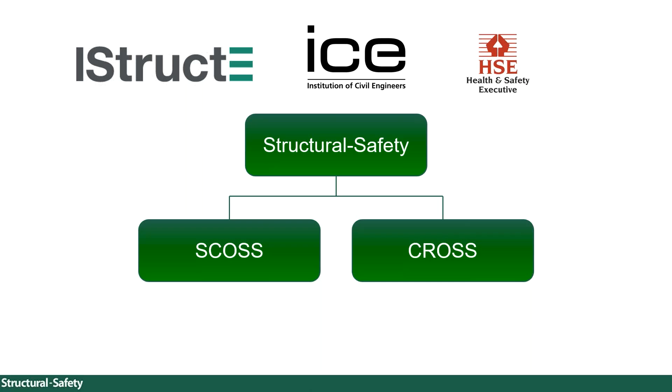And the name Structural Safety is a group that has two parts, which are SCOSS and CROSS. So the first part is SCOSS, which stands for Standing Committee on Structural Safety, and it was set up quite a long time ago in 1976, and their role is to maintain a review of the building and civil engineering matters that affect safety, and they do this by following this very simple process.

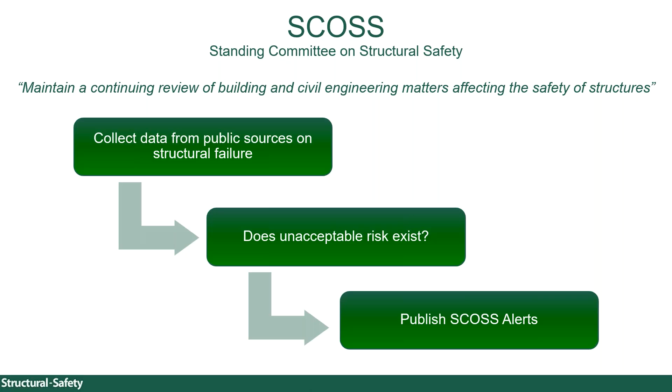Firstly, we collect data from any public sources on structural failures, so that's all the failures that you hear about in the news. We then analyse all that data and decide if there's any unacceptable risk in the industry, or if unacceptable risk might arise in the future. And if there is any unacceptable risk, we then publish safety alerts. Most of the time, the safety alerts are really to raise awareness of that risk so that people can manage it. We're not always able to provide the answers to the risks, so most of the time it's just about raising awareness.

And this slide here shows some recent safety alerts that we've published. So top left was a very severe fire at a multi-storey car park in Liverpool at the end of 2017.

So there was about 1,300 cars that went on fire during this fire. Interestingly, the fire design for car parks is based on the theory that fire will stay in one car if it goes on fire, but won't jump between cars. But in this instance, the fire did jump between cars, and it jumped between levels in the car park. By the time the fire service got to the car park, the fire was already badly out of control. So it's a good example of how a design philosophy can be breached, and the catastrophic consequences that can have.

Top right is the collapse of a steel frame building in London in 2012, and I'll speak about that in the next few slides. Bottom left, I'm sure most of you know about this already if you're UK based - it's the collapse of the outer leaf of a cavity wall at a primary school in Edinburgh, and I'll touch on that in later slides. Bottom right is our most recent safety alert, about the failure of RAAC planks, which stands for reinforced autoclaved aerated concrete planks. These were a form of construction used in the 60s and 70s, mostly in schools, and recently there have been some safety issues with these planks.

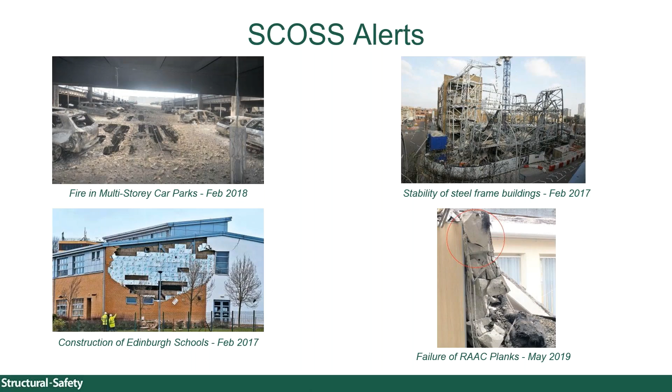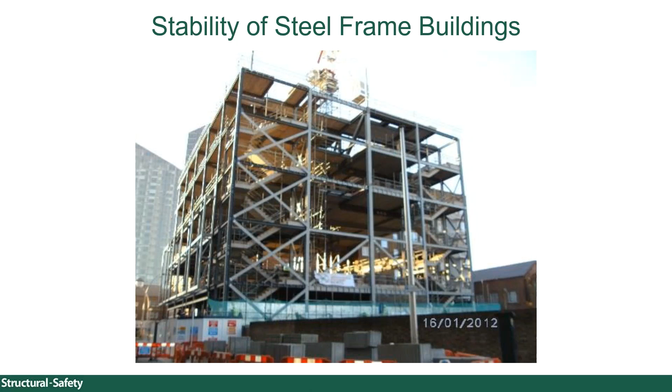So this is the steel frame building in London, which collapsed in 2012. As you can see, it's a braced steel frame, and it was a religious building. One of the design requirements was that they wanted to have a column-free zone at first floor level for large congregations. So this is one of the design drawings.

So in order to achieve this column-free zone, if you look at roof level, you can see there's a floor deep truss that spans from the front of the building to the back - a 36-metre long span truss, which is floor deep. The red vertical elements are tension hangers that were welded to the bottom of the truss, and these tension hangers then supported the third floor, shown in blue. That then allowed the column-free zone below the third floor.

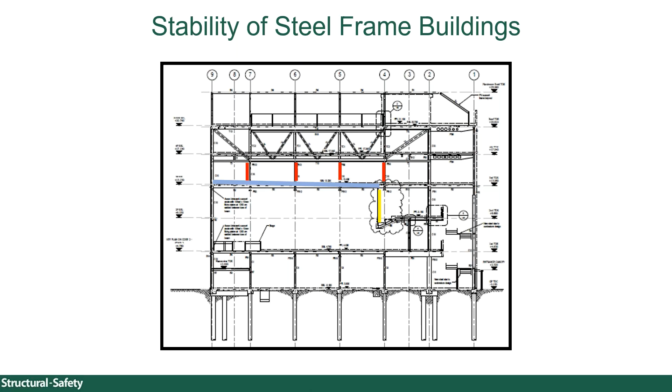So it's definitely not your standard steel frame building design - something a little bit different, and a little bit more risky than a normal design. And then the whole thing catastrophically collapsed. This collapse happened about 15 minutes after the workers left site that day. So although there were no injuries or fatalities, it definitely was a near miss and could have been much, much worse.

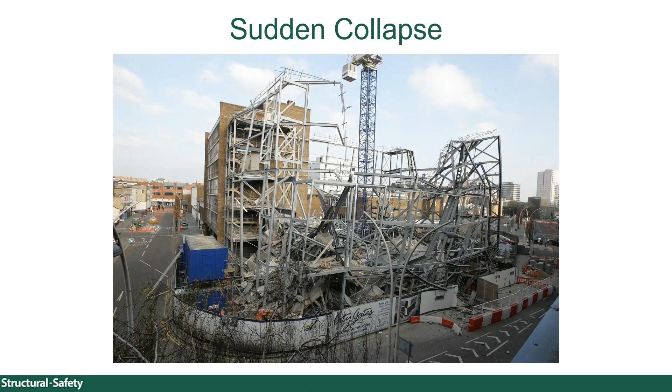So the HSE did an investigation into this collapse, and they were able to share the investigation report with us, and we then produced a short safety alert on it. There were two main technical causes to the collapse.

Firstly, on the left, you can see that there was defective site welding of the hangers to the truss. Just as a reminder, these are the tension hangers that were hanging off the bottom of the truss to support the third floor, and the welding was of poor quality.

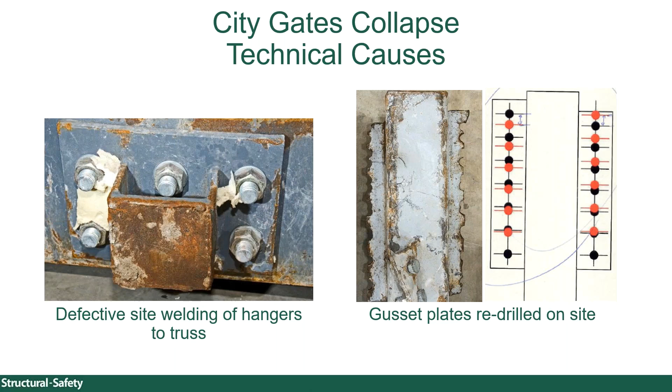Then on the right hand side, at the bottom of the tension hangers, there were gusset plates which were then bolted to the third floor beams. But when the contractor on site went to bolt these gusset plates to the third floor beams, the bolt holes weren't lining up properly, so they re-drilled the bolt holes, shown as the red holes on the right. For all you structural engineers tuning in, you'll know that significantly reduces the shear capacity of the gusset plate along the line of the bolt holes.

So what are the main lessons to be learned from this collapse? The first one's about robustness - structures should be designed to be robust so that a local failure does not cause disproportionate collapse. One theory about why this collapse might have been so catastrophic was that one of the tension hangers failed, and that then overloaded the adjacent tension hangers, giving a zip effect of all the tension hangers failing. That just shouldn't happen, because post Ronan Point, now that we have part A3 of the regulations for disproportionate collapse, structures should be designed to be robust to prevent this kind of failure.

And the second point here is that if you're designing any tension structures, always try and design them to have some sort of ductility so that you can get warning of failure.

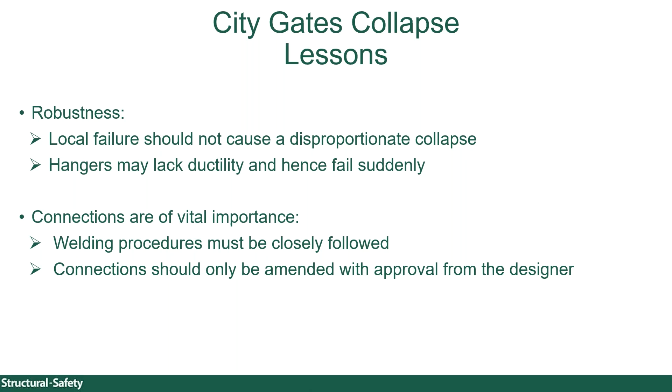The second lesson is about the importance of connections. On this project, they decided to weld what was a very safety critical connection. Our advice would be to try to avoid site welding if you can - go for bolts or off-site welding where it can be done in a more controlled environment. But if you have to do site welding, then you've got to follow the procedures very carefully, and that's everything from preparing the surface, to getting the right qualified welder, to implementing the weld, to testing the weld, inspecting the weld, approving the weld. There's a whole host of procedures that have to be very carefully followed.

Interestingly, one of the HSE's recommendations on this project was that the structural engineer could have specified 100% inspection of these welds because they were so safety critical. And the second point on connections is that contractors should not be amending any design on site without going back to the original designer first of all.

The third lesson from this incident is that designers should always try to make contractors aware of risks involved with unusual structures. Although that seems fairly obvious, it can be difficult, especially on a large project, because you become very familiar with it and risks might seem obvious to you. But would a contractor who's only looked at your drawings for an hour or two, and doesn't understand your design in as much detail, appreciate those risks? Maybe not. It might be a good idea to get a colleague in your office who hasn't been involved in the project to look at your drawings and see if they spot the risks you think are obvious.

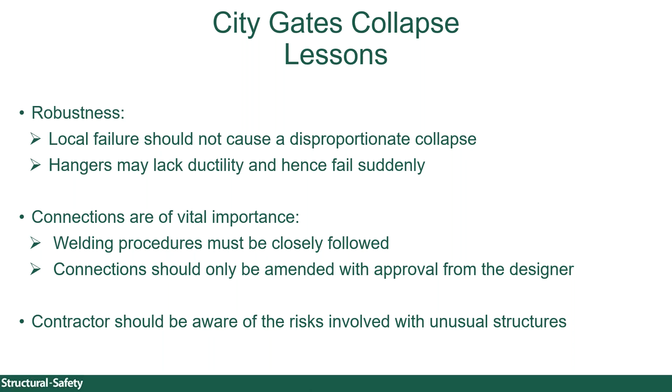This is the Edinburgh Schools wall collapse. It was a gable end wall that collapsed due to a wind suction load. Wind comes along the length of the building, and when it gets to the gable end, it causes suction on that wall. Nine tons of masonry collapsed here. Similar to the last example, this was a real near miss, because this was a pathway kids used to walk into school every morning, and the collapse happened just a few hours before the kids would have been there.

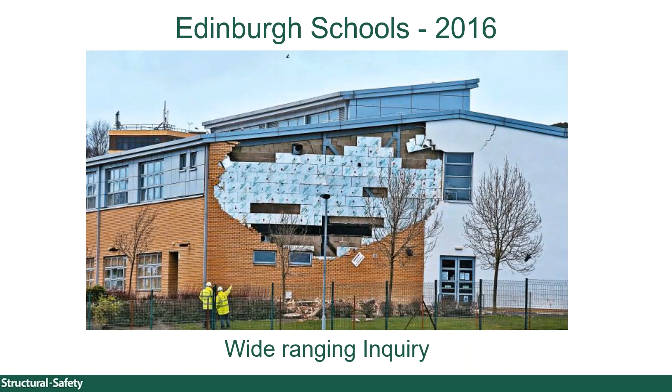The Scottish government did an inquiry into this collapse, so it's a publicly available document you can find online. Like any collapse, there was a whole host of issues that combined to cause it, but one of the main causes was inadequate tying of the inner leaf to the outer leaf of the cavity wall. I'll explain why that happened in the next few slides.

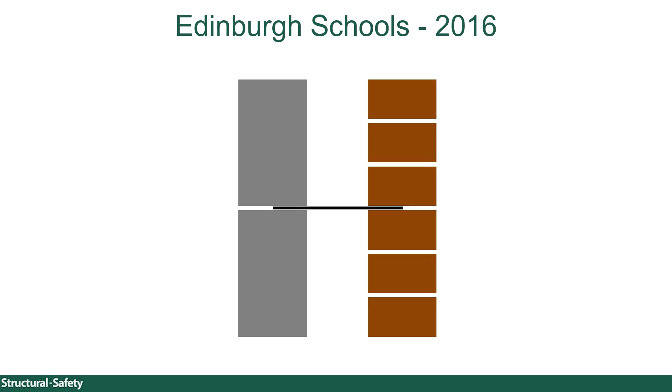Typically, if you're building a cavity wall, you build the inner leaf and outer leaf together, putting in wall ties as you go, so there's no real safety risk there—it's a fairly simple process. But on this project they were running behind on program, so to save time they decided to build the inner leaf first, since that allows a watertight building and lets follow-on trades start working inside. So they built the inner leaf and put the wall ties in, but it's pretty clear the wall tie isn't balanced in that state, because there's no outer leaf there to balance it.

This is only a problem with the heavier wall tie types—if you've got the lighter types, it won't even be an issue. But with the heavier types, the wall tie will fall over. It's not really a big issue though; there are a lot of solutions. You could hold the wall tie in place while you put the next block on top to stabilize it, you could get longer wall ties, or you could mechanically fix the wall tie to the block.

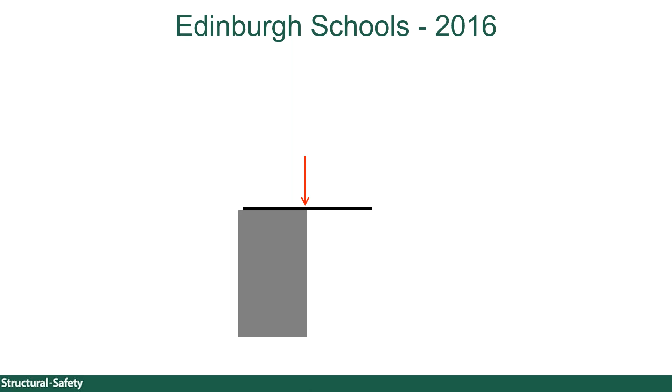But the brickies on this project were getting paid per brick or block, so the quickest thing for them to do was move the wall tie inwards so it was balanced on the inner leaf. That meant when they went to build the outer leaf, they no longer had the minimum 50 millimeters embedment. So it should be pretty obvious that when a wind suction load comes onto this wall, it's going to pull the outer brick leaf down, because it's effectively acting by itself with very little or no support from the inner leaf.

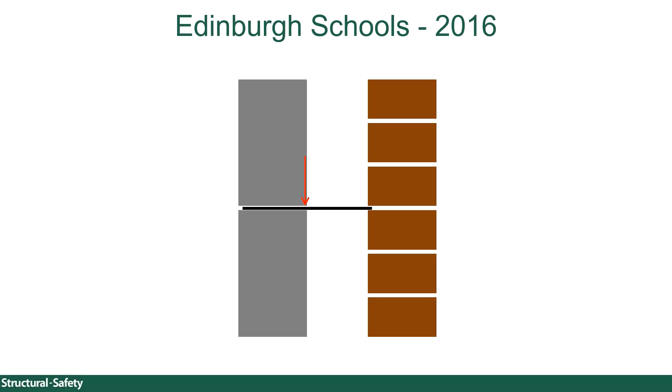So the alert discusses several topics. One of them is long span steel beams, where the rotational demands at the end connections are proportional to span cubed. So SCOSS feel that it's questionable whether industry standard detailing rules remain valid for such long span steel beams. For example, if you have a very long span steel beam that's designed as simply supported, but there's very high end reactions that require a large number of bolts with very deep connections, then that connection might behave more like a fixed end connection as opposed to a pinned end connection.

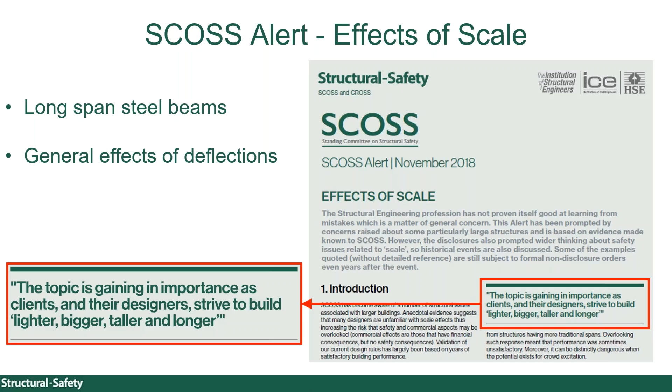General effects of deflections are also discussed, where deflections due to tolerances combined with bending can lead to in situ concrete slabs being much thicker and therefore much heavier than designed for. This is the case if a beam is going to bend downwards, and if the tolerance is also downwards, then you can get this situation arising. This is especially a problem if the slab is designed to be installed level as opposed to a constant thickness, because if you imagine at mid-span of a beam, the beam's bending and you want to put more concrete in to get the slab level, that's just going to add more load to the beam at mid-span, which is going to cause it to bend even further.

The alert also discusses steel thicknesses, where it doesn't seem to be uncommon now in projects to have steel thicknesses of over 100 millimeters. The danger here is that designers might be moving into territory that they might not have much experience in, so they might overlook some key technical issues, such as the fact that thicker steel is less homogeneous, so it's more prone to lamination, or becomes more vulnerable to through thickness cracking.

Now, these are things that you can design for, but you can only design for them if you know that risk is there. And similarly for welding very thick steel, thicker steel requires more care in welding, since the cooling rate of weld beads is linked to the thermal conductivity of steel, which in turn is linked to the thickness of the steel. So the welds in thicker steel will cool quicker, so they might become hard and brittle, and therefore they might not meet the ductility requirements. But again, if you're aware of this, then you can manage it by either applying specialist welding procedures or post-weld heat treatment.

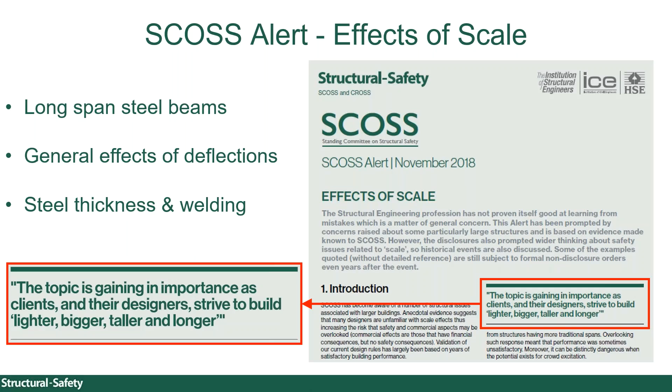Okay, so that's SCOSS. So just as a recap, SCOSS are looking at everything in the public domain. The other part of structural safety is CROSS. CROSS stands for Confidential Reporting on Structural Safety, and it was set up in 2005 with the role of really capturing and sharing lessons learned from safety issues which might not otherwise have had formal recognition.

So basically, the thinking at the time was that it's very good that SCOSS are looking at everything in the public domain, but there's a huge amount of stuff that happens below that never makes it into the public domain. So they decided to set up CROSS as a mechanism for the industry to submit reports and share and learn lessons from each other.

So stage 2 of this process is that we then process the report. There's 2 parts to this. Firstly, we remove the reporter's details, so there's a very small number of people that ever get to see the reporter's details. And we also remove any identifiable details from the report because we're not interested in blaming anyone or anything. So we remove any reference to a project or a product or an individual or a company.

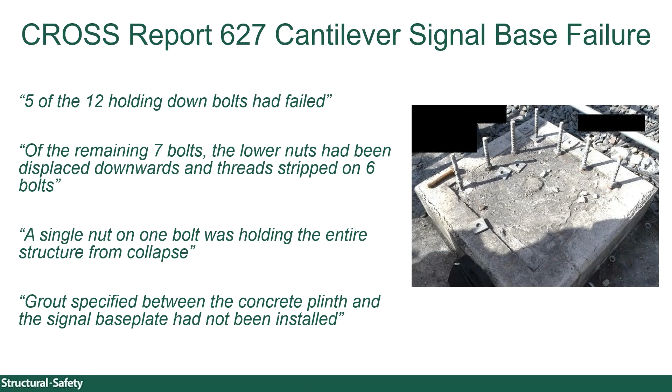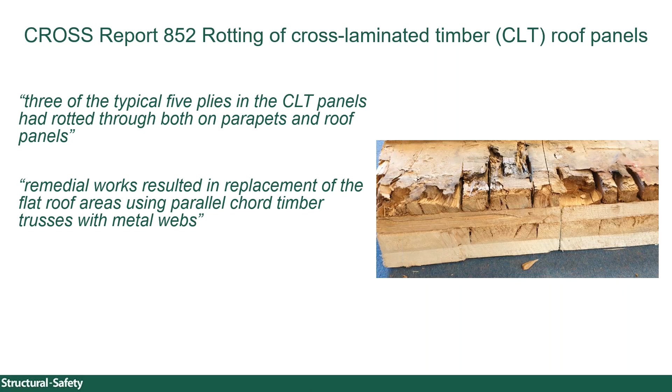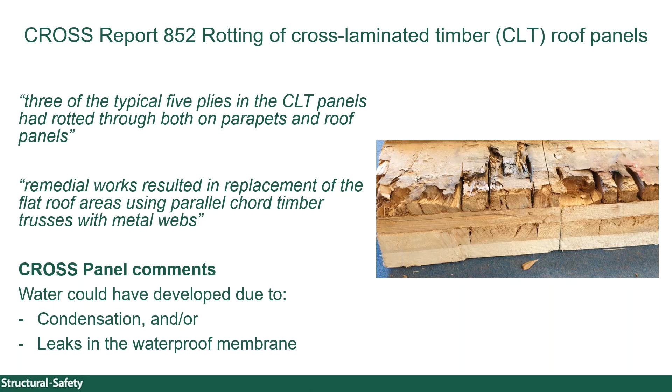They go on to say that the remedial work consisted of replacement of the flat roof areas using parallel chord timber trusses with metal webs. The CROSS panel's comments for this report focused on how the water could have developed, which they speculate could have been due to condensation or leaks in the waterproof membrane. They included links to a British standard on controlling condensation in buildings, as well as BRE papers on CLT and thermal insulation. If you want to read this report in full, have a look at our latest newsletter on our website.

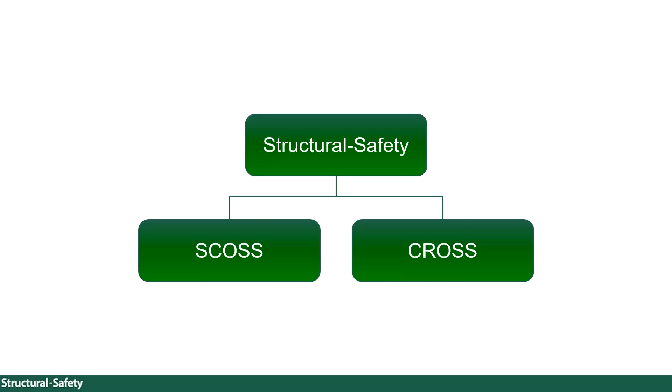I hope those explanations of SCOSS and CROSS make sense, and that provides a bit more clarity.

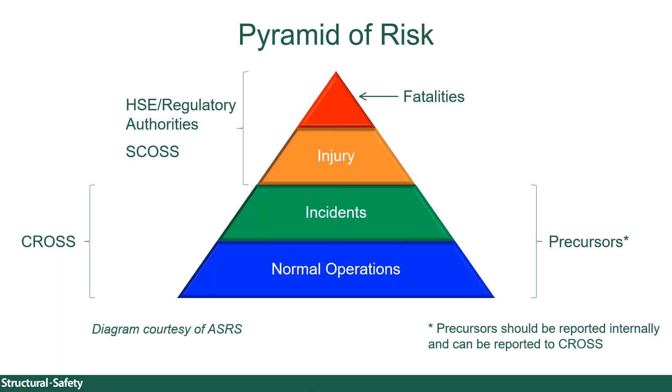We have a SCOSS committee and a CROSS panel, probably about 20-25 people altogether, mostly engineers from all different fields and industries. Contractors, we've got a government representative, HSE, Highways England - a lot of the major players are involved. We even have a solicitor who reviews all of our work before we publish it, and then we have a few young members there as well.

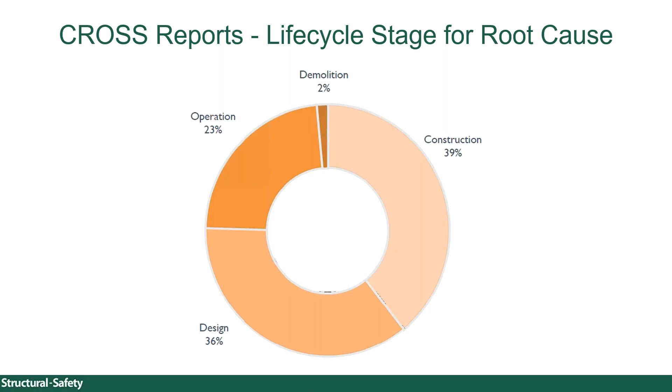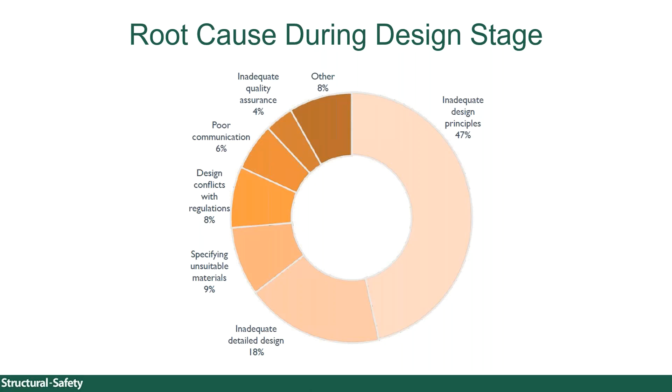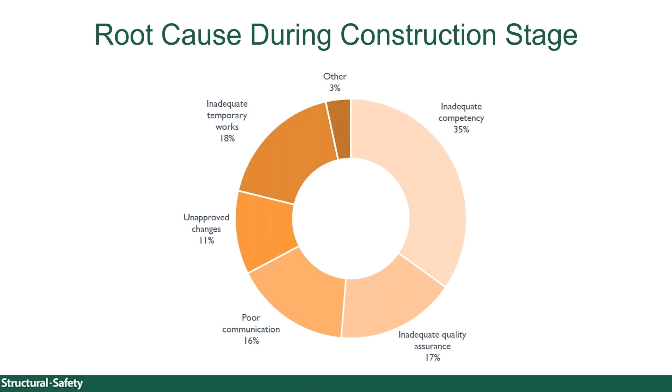As I said, we try to look for trends in our reports and then take action on those trends. So fixings and connections is a trend.

On the left was the collapse of a suspended ceiling in a cinema. It happened overnight, so again, a near miss. Here they used lightweight fixings to connect the ceiling to the slab above, but it wasn't a lightweight ceiling at all—it was 50mm thick plasterboard with quite a lot of services, so it just wasn't taken very seriously.

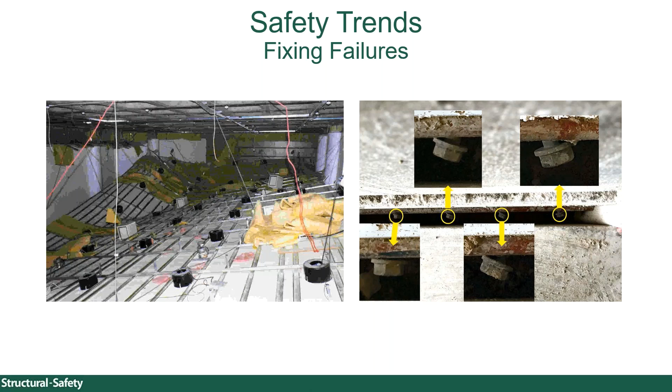On the right, this was a steel angle being bolted to a reinforced concrete core, and that steel angle was then going to support precast concrete stairs. But when the contractor went to bolt the steel angle to the core, the bolts clashed with reinforcement in the core, and instead of just taking the bolt out and moving it 30mm to the side to avoid the reinforcement, they tried to angle the bolts to miss the reinforcement—just really poor construction practice.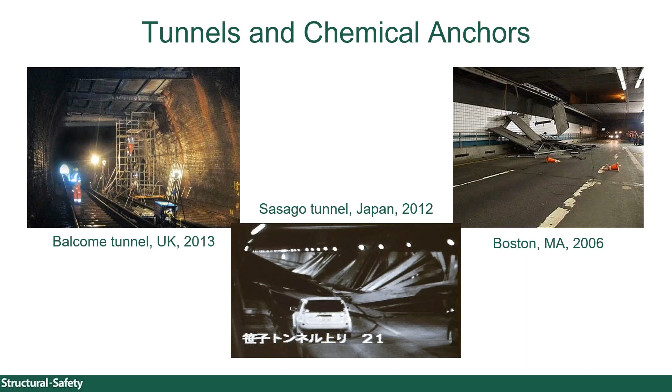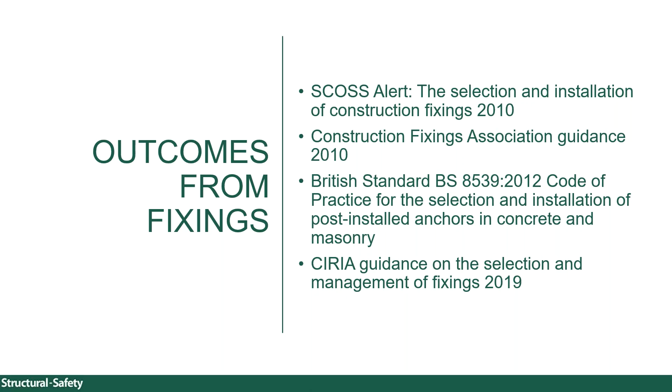So we issued a SCOSS alert in 2010 on fixings. In the same year, the Construction Fixings Association issued guidance. There's a British standard there for fixings now. And literally a few months ago, CIRIA released really extensive guidance documents on the selection and management of safety critical fixings. So there's quite a lot of good information out there now.

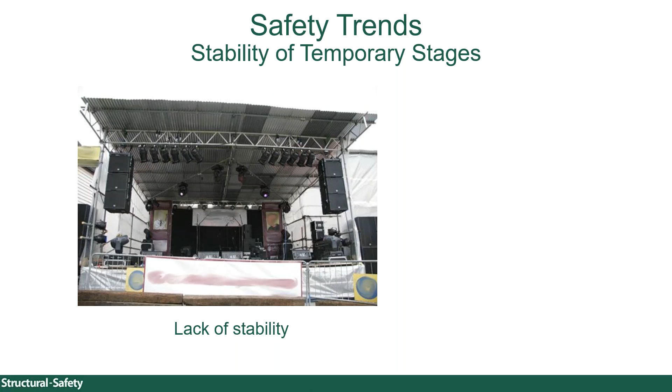Around the same time, we received a CROSS report about another temporary stage. This time there was a stability system—they used water tanks connected to the stage by straps. But there's a whole host of issues here. Firstly, the straps aren't even tensioned.

Secondly, the tanks aren't anchored down to the ground. So if it's a wet day, the tanks might just slide along the wet grass because the coefficient of friction will be low. And thirdly, water tanks just isn't a very robust solution, because if someone punctures a water tank, then you've lost your stability system. But again, no collapse, but the precursors for a collapse are definitely there.

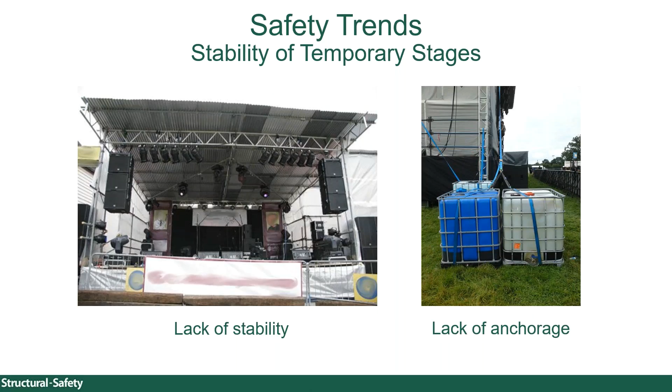And then about a year after we received these reports, a stage in Indiana collapsed during a concert, where 7 people were killed during the collapse. And the stability system here was actually quite similar to the last example of water tanks, but instead of water tanks, they used concrete blocks, which is more robust.

But the designer had specified that the concrete blocks were to be placed on top of concrete. But then when they started to install the little marquee shown in white around the main stage, these clashed with where the concrete blocks were meant to be. So some of the concrete blocks were actually placed on top of grass instead, which has a lower coefficient of friction. So the blocks slid along the grass.

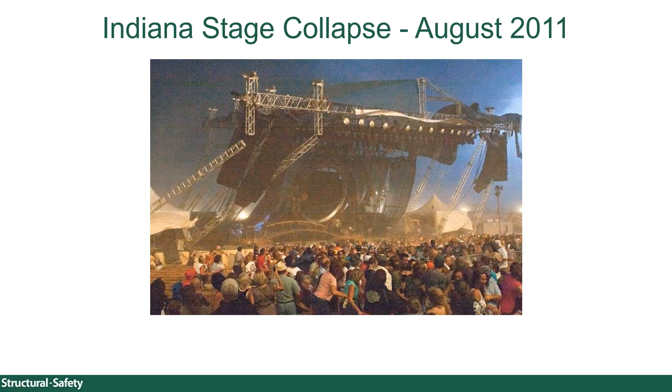So again, we issued a safety alert on this. And that safety alert was used as part of the checking procedures for the 2012 Olympics in London, which had a really good safety record. And the IStructE have an excellent guidance document on temporary demountable structures as well. So again, there's a lot of good information out there on that topic now.

So tower block tragedies, Ronan Point, for all the structural engineers tuning in, you'll be well aware of Ronan Point. So 1968, there was a small gas explosion at the top of this tower, and it caused the external wall to pop out, and the slabs above then fell down onto the slabs below, and you had a progressive collapse of the corner of the structure.

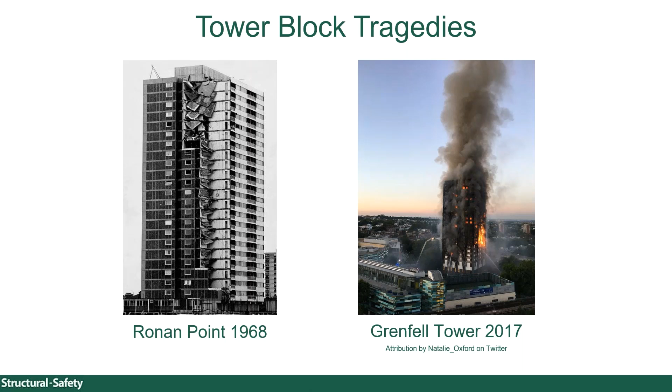And the thinking at the time was that the damage caused was actually disproportionate to the initiating incident. And that is where part A3 of the building regulations for disproportionate collapse came in. So the point of showing this slide is to say that you never want something like this to happen, but the positive is that the industry reacted by improving legislation so that going forward structures will be designed to be more robust. And then on the right you've got Grenfell Tower, the ramifications for which will change how the risk of fire is managed for tall residential buildings.

So what does 60 minutes fire resistance mean? I added this slide probably well over a year ago. I attended a lecture from Colin Bailey. It was his inaugural lecture for becoming president of Queen Mary University of London. His lecture was on collapse of World Trade Center 7, which collapsed due to a fire. A very, very interesting presentation.

So Colin, he's a structural engineer with a specialism in fire, and what I found very interesting was that he said throughout his career he's seen a lack of understanding of the behaviour of structures during fire from engineers. And he asked this question, and a lot of people didn't seem to know the answer. So I'm a structural engineer, and I thought I knew the answer to this question, and I didn't.

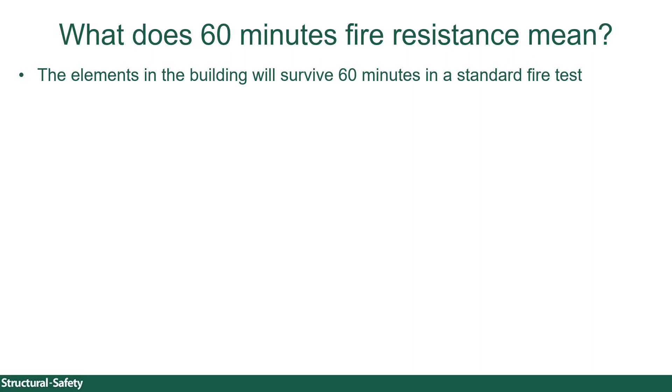So the two common misconceptions are that 60 minutes fire resistance means that the building will remain stable for 60 minutes, or that it will allow people to evacuate within 60 minutes. Very often both of those statements will be true, but that's not what 60 minutes fire resistance means. What it means is that the elements in the building will survive 60 minutes in a standard fire test, so it doesn't mean anything else.

And that standard fire test follows a standard fire curve, so you get an element, you increase the temperature versus time, and you measure the load bearing capacity, the insulation, and the integrity. And if it passes that test, then it gets a 60-minute fire stamp.

So the question then is, let's say you design a steel frame building, if all the elements in that building pass the 60-minute standard fire test, then why can't you say that the building's going to be safe to evacuate within 60 minutes, or that it's going to stand up for 60 minutes? And the reason why is because you're then making the assumption that the members will provide the same level of performance, i.e. behave in a similar way when they form part of the building. And Colin went through a whole host of reasons about why that assumption isn't valid.

Some of the things I remember: the test is always based on a 4.5 metre long member, so if you design members longer than this, they'll behave differently during a fire. The test also doesn't consider cooling effects. If you heat up a steel beam it expands and plastically deforms, and then when it cools down again, because it's plastically deformed, it shortens along its own length, which causes huge tension forces in the end connections that may cause them to fracture. The test doesn't consider this.

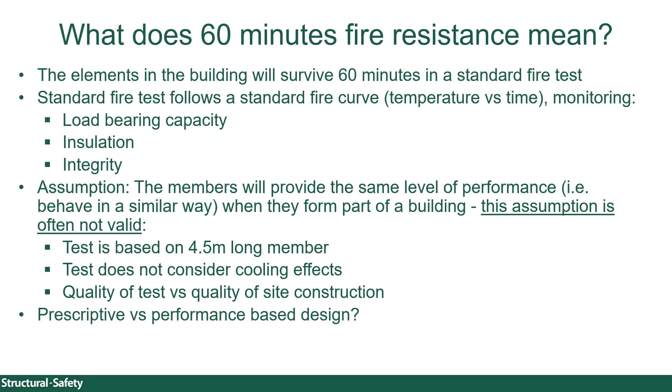So back to Grenfell then, what are the government actions? There's a public inquiry taking place, commissioned by the Prime Minister at the time, Theresa May, and led by Sir Martin Moore-Bick. They published the phase 1 report a few weeks ago, which was a factual narrative of what happened on the night of the fire.

Phase 2 of the inquiry is probably of more interest to engineers, because it'll look at how the tower became exposed to the risk of major fire. It's going to look at the design, construction and management of the building, including the refurbishment where the cladding was added.

I believe the hearings for phase 2 are expected to begin soon. If you want to follow the inquiry, I'd highly recommend the BBC podcast on it, which gives a short summary for every day the inquiry sits.

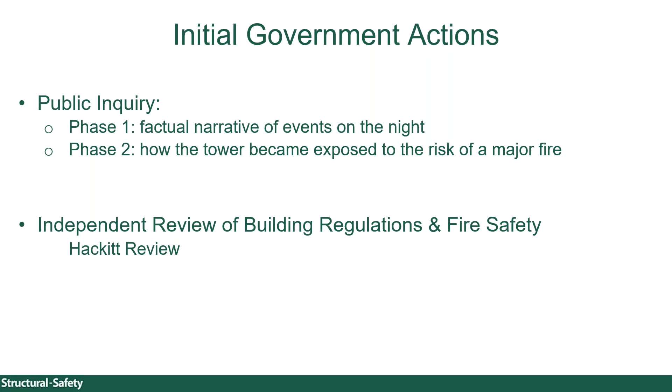The government also commissioned Dame Judith Hackitt to conduct an independent review of the building regulations and fire safety. This review happened at a much faster pace, and Dame Judith published her final report in May last year, with over 50 recommendations to improve building safety and address systemic failings in the regulatory system.

So what were her main findings? She found that roles and responsibilities for building safety were unclear, regulations and guidance are ambiguous and inconsistent, compliance with the regulations is weak and complex, competence of people in the system is patchy, and product testing, labeling and marketing were also called into question. Even when residents raised safety concerns, it was found that they very often weren't listened to.

Dame Judith came up with over 50 recommendations. In summary, she recommended there should be a much tougher and stronger regulatory framework, and a new building safety regulator comprising the Fire and Rescue Service, the HSE, and local authority building control. She also recommended introducing a safety case approach, a structured and controlled way of managing risk, particularly structural and fire safety risks, throughout the life cycle of the building.

She also recommends there should be clear responsibilities to manage risks during the occupation stage of buildings.

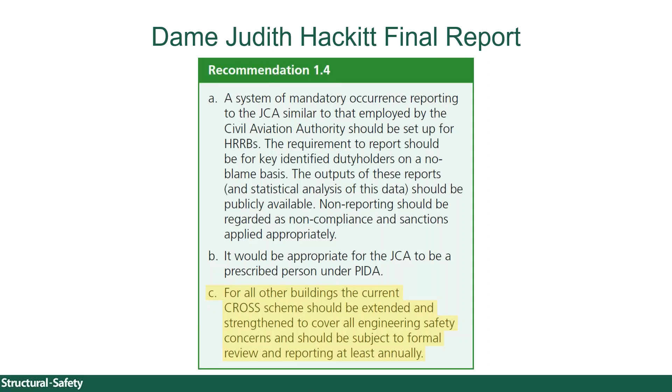So what's the likely consequences from all of this? There's going to be changes to the building regulations. This has already started to happen, where Approved Document B for fire has gone under consultation. There's already been changes to it, and there will be more changes. Other parts of the building regulations are also likely to follow, and there's going to be a more rigorous process for managing risk in higher risk residential buildings.

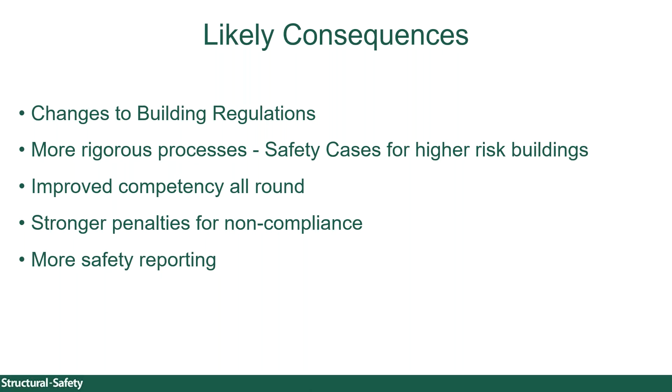There's going to be improved competency all around, so all of the professional bodies have been meeting over the last year to 18 months to discuss competency requirements for working on these buildings. There's going to be stronger penalties for non-compliance, and more safety reporting with the expansion of CROSS and the introduction of a mandatory reporting scheme as well as a voluntary CROSS reporting scheme. It'll also be a requirement to have digital records for these buildings.

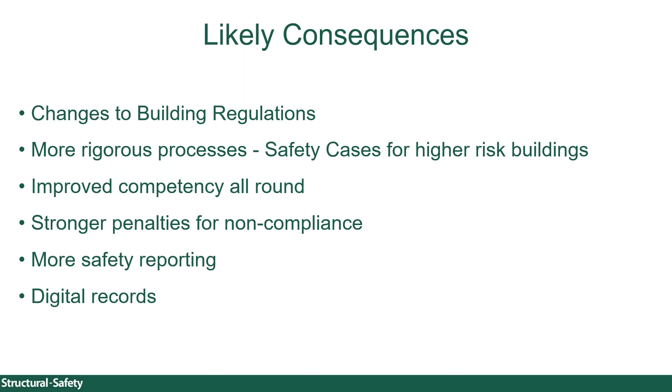Okay, so last few slides. We're in the process of setting up CROSS International at the minute, where there will be parallel CROSS schemes in other countries. And this is great - other countries have seen the success of CROSS in the UK, and they want to have CROSS in their country too, which we're more than happy to help them with. We already have schemes in Australia, Southern Africa, and a few months ago we launched in America, and Germany are planning to launch sometime next year.

And the long-term vision is that we'll have one big international database of all these CROSS reports so that we can all learn from each other across the world.

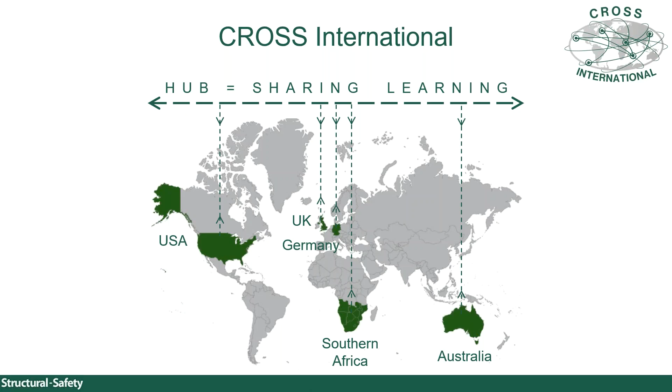So final slide, what's the benefits of confidential reporting through CROSS? This is a quote from Eleanor Roosevelt, former First Lady of the US. She said, 'Learn from the mistakes of others, you can't live long enough to make them yourself.' A very wise quote.

Submitting reports to CROSS helps us to identify safety trends. These might be trends that you already know about, but you're not sure how widespread an issue it is, or they might be new safety trends coming into the industry. As an example, recently we've been receiving quite a lot of reports about the failure of structural glass, so that might be a trend that we have to address.

It's a proven system - we have based CROSS completely on confidential reporting in the aviation industry, which has been very successful, so it does work. We're not a regulator, we're not a whistleblower organisation. No one gets in trouble from submitting reports to CROSS. We don't blame anyone. We're totally independent, and we're only interested in sharing the lessons that we learn from reports.

It's a proactive system, so if we go back to that pyramid of risk, we're very much focused on the lower levels of that pyramid. It's almost an early warning system of what might go wrong, which gives us the opportunity to take some action to try and prevent the more serious incidents at the top of the pyramid.

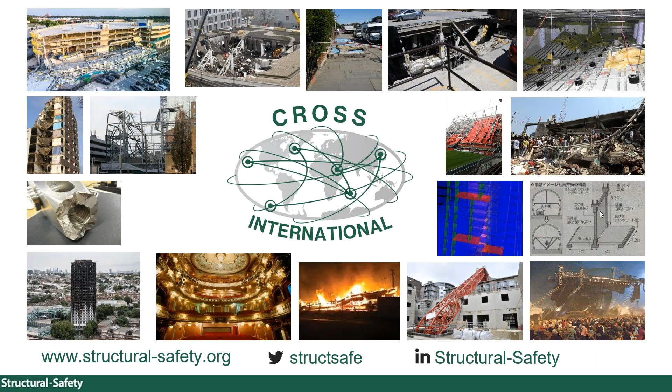Right, so we've got a few questions that have come in. I'll start with a statement from Stuart. He said, 'Excellent presentation, thank you. From my experience as a building engineer, it is worth subscribing to SCOSS and CROSS. Highlights issues you may not be aware of and focuses the mind on domestic and non-domestic structural issues.'

We've got a question from Graham: 'Although confidential, do you have problems getting information when investigating issues?' Typically when reports come to us, because the person sending is interested in sharing lessons learned, they'll have already done an investigation and will share the causes with us. So generally we don't have that problem. Sometimes we get reports where the company isn't sure why something happened yet and they're still investigating. In that case, we'll tell the company to hold off, and once they've done the investigation and can share that extra data with us, we'll publish the report. So generally it's not really an issue, no.